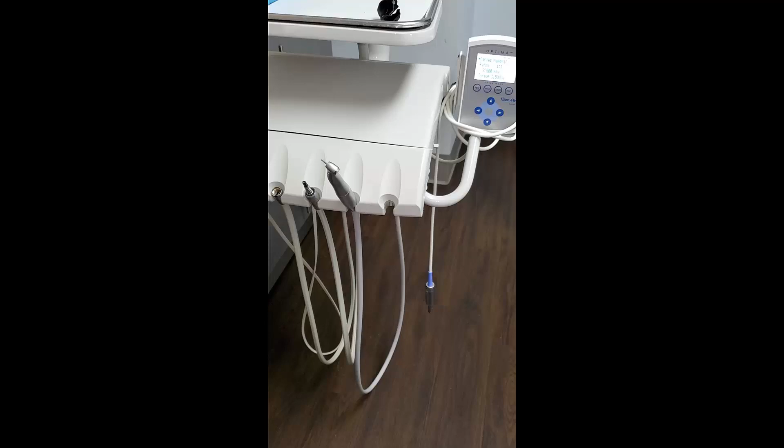So last week on my Instagram and Facebook feed, I mentioned how my Endo handpiece is not designed to fit in this type of delivery unit. It's either this Pelton & Crane delivery unit, or it doesn't fit in my A-dec either.

So yeah, that's always frustrating. They have a little cradle you can set on top, but I think that's obnoxious. I'm just not used to setting a handpiece up there, plus the file is poking out by everything potentially. So anyway, I tend to put it in here and forget, and I don't want to drop it.

So what I did is I took some PVS putty, and maybe I'll find that video later, and I basically wrapped it around here.

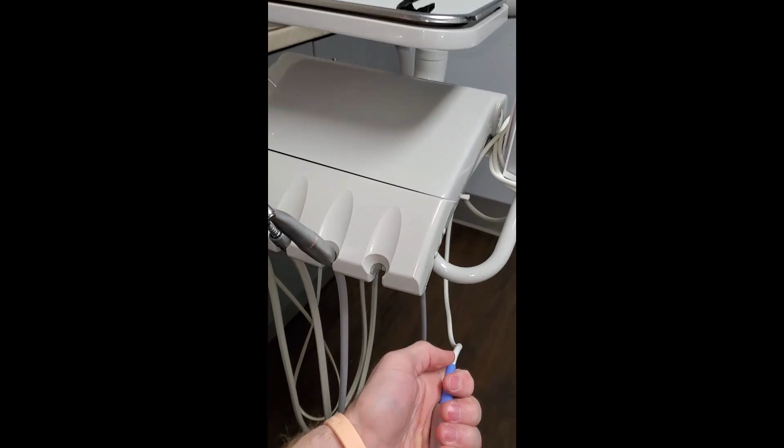Okay, I paused the video. I went back to my office, and this is basically the mold I made of it. You can see that it sort of slides over. It's hard to get this. Oh yeah, I taped it together, so it's a piece of tape, so I won't even be able to separate this very easily. But basically, I wrapped it around there and then shoved it in there, let it set, pulled it off.

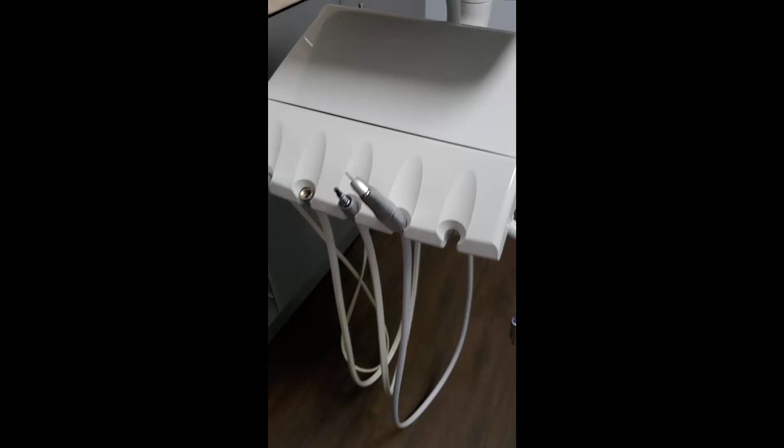And then peeled it apart. I took just some Scotch tape, and then I scanned it in my cone beam to make basically a DICOM of it, and then converted that to an STL. And then that STL, I redesigned and modified it to be exactly how I wanted it to be, and this was the net result.

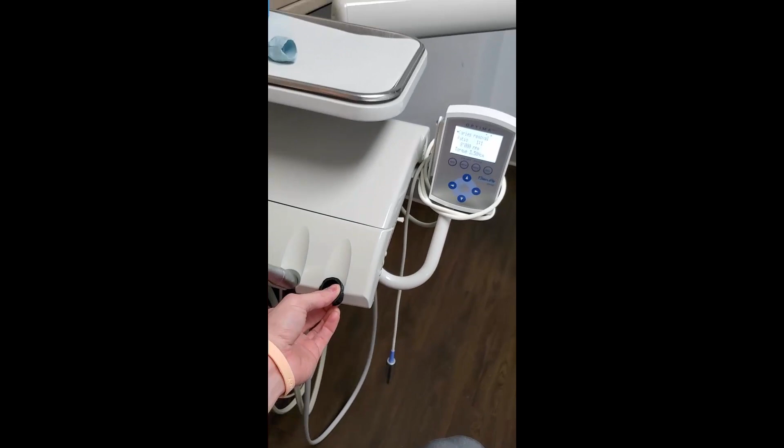Okay, and so honestly, it reminds me of a larynx. I don't know, it's hard to describe, but it looks like somebody's throat. But you can see that it's got a channel, and this whole thing is meant to fit right in here, and it's very stable. If you can see, I'm moving the whole thing around. Now I can get it out if I want, but it locks right in there.

I printed this, by the way. I designed it mainly in MeshMixer because these shapes are sort of unique. I didn't want to have to do more sophisticated design.

But then this fits right in there. You see that? It locks in there. It's not going anywhere. You don't even have to have it all the way in, and it's not going to fall out. Much more secure. Let it fall, set it up in there, and it's done. And again, it pops right out when you're all done with it.

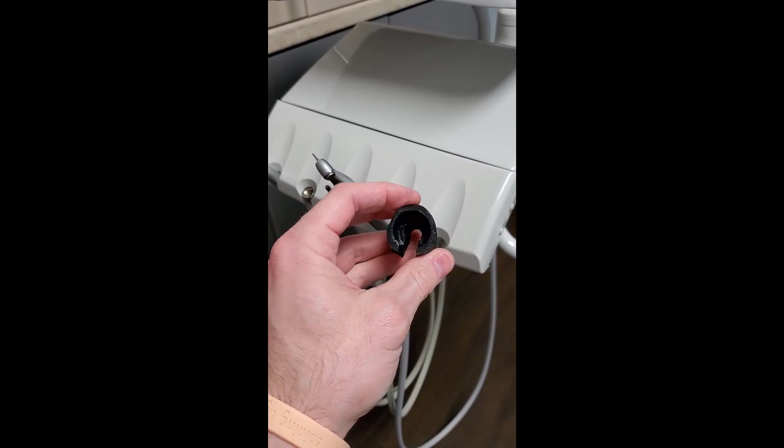So anyway, just kind of a cool way to use our technology that we have, which would be, in this case, I used a cone beam, and then I used MeshMixer, a free software to design it, and then I used an FDM, a Prusa MK3 3D printer with PETG filament because it's a little bit flexible. Can't tell much, but it is.

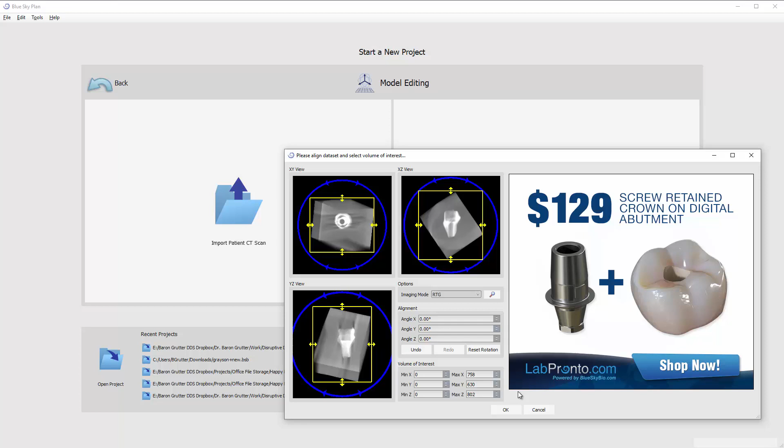Geez, I'm all out of whack here. Whatever, go ahead and move forward. And the software should open up, and then we'll have a chance to convert this into an STL file. Honestly, I'm not sure which of those three planes was correct, so rotating was kind of pointless there.

All right, let's hit close. All right, so here we go, here's our little object. And it looks pretty good. I am going to take a look at it. Everything looks pretty solid, except there are no holes in these locations.

So I'm going to try and expand it until that goes away. I don't mind if there are holes, because I can fix that later, but I do want to. I'm basically going until there's no artifacts, or sorry, no little blebs sticking off. There's a little bit here, and it's tough because you're trying to turn this CT image of PVS into a solid STL object. This is where it was sitting on the sponge, I believe.

You're going to get a little bit of haziness down here, but anyway, I'm going to go back to where I was. Everything's closed. This looks the closest to what it really was, and I'm going to go ahead, I think I'm going to trust this.

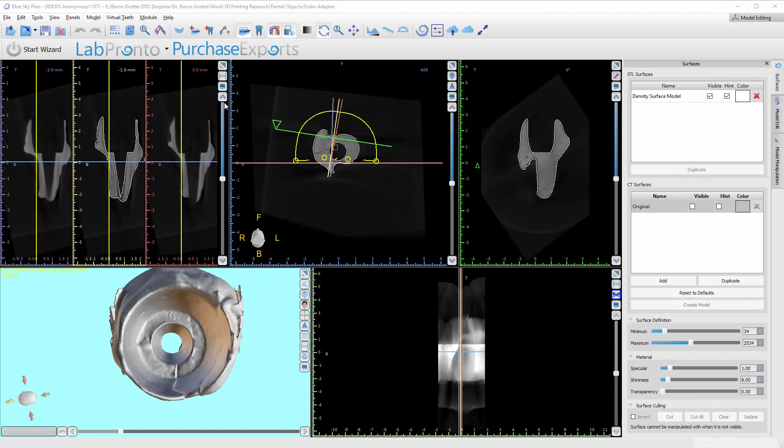All right, and I'm back. So now you can see, well, this view right here is pretty good, it rolls right around and it's turned into a physical object. Now I'm going to say that it looks to me, based on the data, that it's—

A little bit positive, a little bit big on it, but it's hard to say for sure. But I'm okay with that because I can always shrink it back a little bit as I work through this and develop from here.

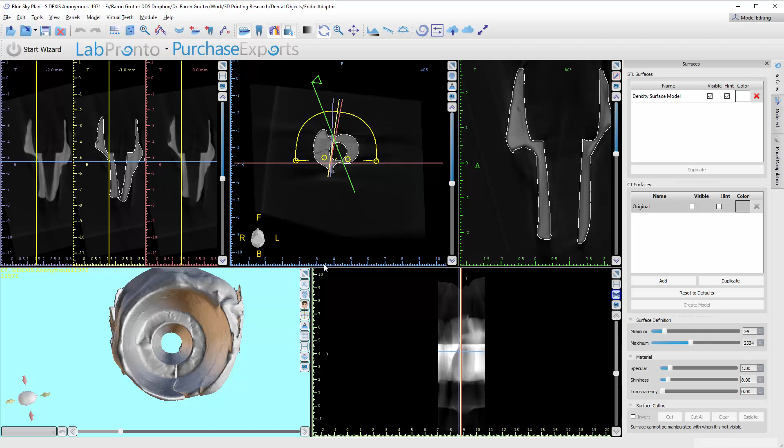So, am I happy with everything? Everything looks pretty darn good to me. Actually, come to think of it, I am glad that I oriented it, even if I didn't orient it properly, which I actually want to say did the way I wanted it to. I wasn't really sure, but having it this way, having oriented it already when I imported it, makes this analysis much easier. Otherwise, it would be all awkward in position and whatnot. So yeah, that was probably a good thing.

The nice thing is, as I mentioned, it's being a little bit positive here. Worst case scenario, since this is a tapered object, it's just going to sit a little bit high, and so will the handpiece sit a little high. So I need to kind of figure that out.

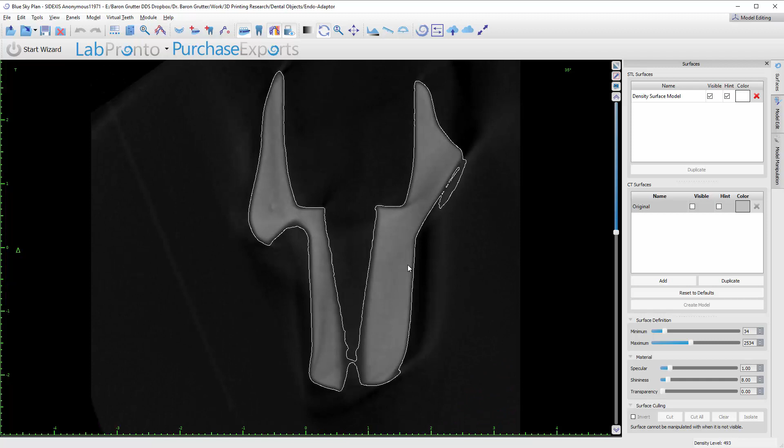What I'm going to do is go ahead and measure the diameter of the handpiece and see how that compares to here, and that'll give me a good idea of how true this is if I need to make any adjustments. The rest of it, the tapered portions, I'm not too worried about.

All right, I'm going to go ahead and, oh yeah, to export it, now I've got this, I can turn off the DICOM and I can see, let's change the color here so you can see what it is that I've actually created. And here's the STL.

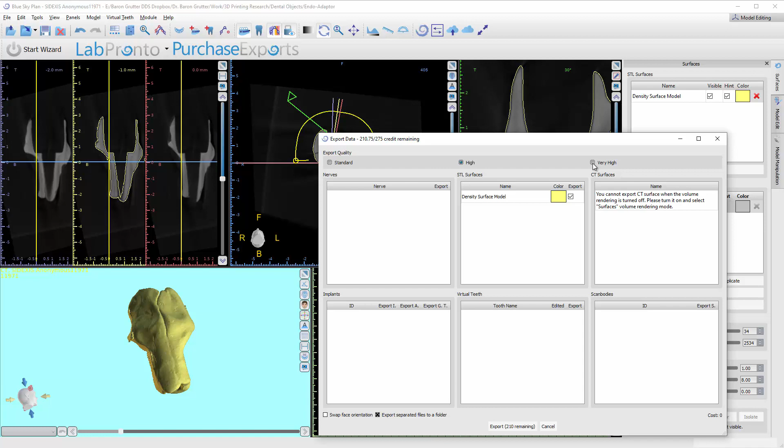Okay, I'm going to export this by going here, export data. Just click on that. I don't really think it matters, but I'm going to go ahead and click very high, and go ahead and click export.

All right, it's exported. Now I can work with it in other software.

Okay, so I did go ahead and measure, and the internal diameter here should be about 22 millimeters for exact contact with the actual handpiece. So I'm going to aim for 22.5 so I can have a little bit of passivity, but yeah, that's about it. So the first thing I'm going to do is I want some clean margins.

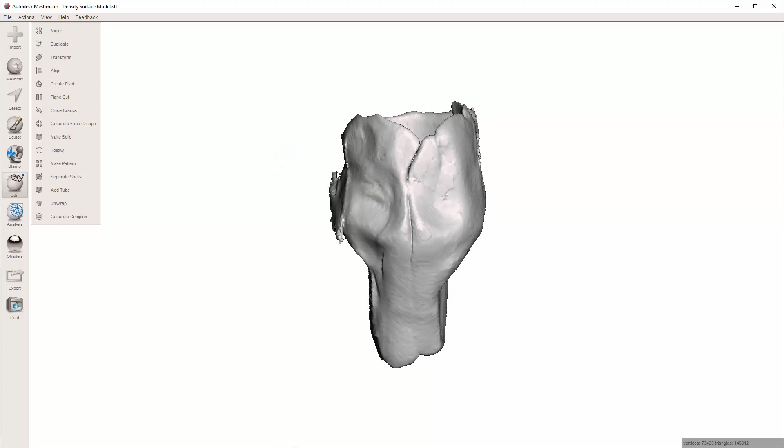I'm doing this on the fly. I haven't actually worked through this, but trying to decide. I was going to plane cut it, but I actually want it exposed. You'll see, I want it to be exposed. So I'm going to go ahead and hit the S button to select, and I'm going to chop it right here, move it up a little bit.

Okay, I'm going to hit B to give myself some smooth borders. Okay, let's take a look at that. That's pretty good. I guess I don't know that I want that much in. Well, yeah, that should be fine. I'm going to go ahead and hit delete.

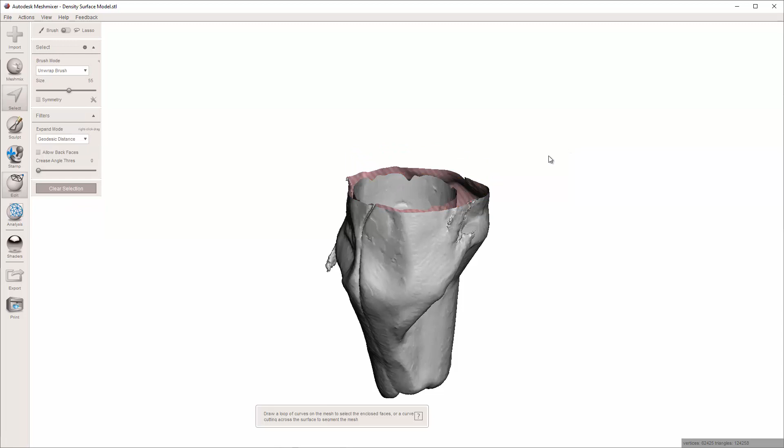And so now I can work from here. Now, one thing I do want to do is bridge this area right here. I don't like the fact that it didn't close up right there. So I'm trying to think of my best solution here.

Let's select again. Let's make that a little bit smaller. And let's just sweep right up here. Okay, unselect that, or deselect that.

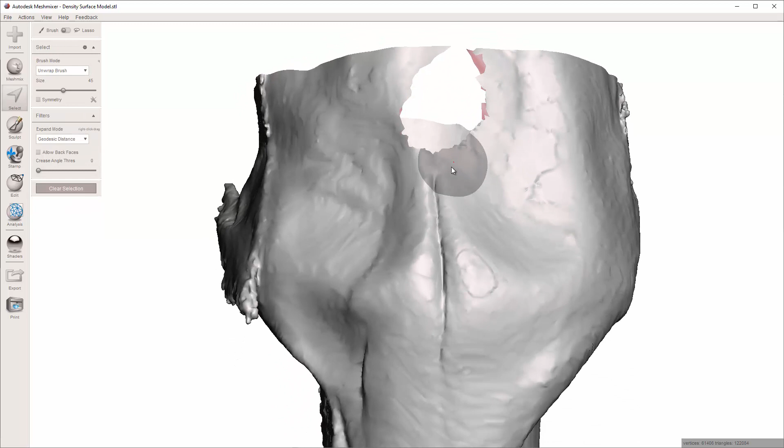And I think we're probably pretty good. Let's hit delete. And now I'm going to go ahead and make this smaller. Here and here. Control B to bridge this across. Looks good. S to select. Select Control B. Looks pretty good. Okay, and now I can just repair these areas.

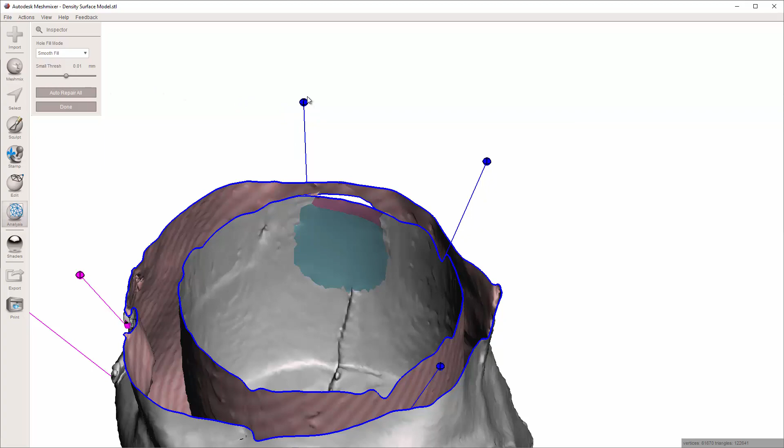Oh, that's a flat fill. I didn't mean to do that. Good, I didn't click it. I'm going to hit smooth fill and click on this guy, click on that guy, and it looks pretty good.

So now, I'm curious, what were those other errors? Obviously, I don't want to close these rims off, but I'll go ahead and repair that, see what's going on. Okay, there was a little hole, a little tunnel somewhere, and I think that may have just fixed that. This is where I was worried about it having one, and I don't think it is anymore.

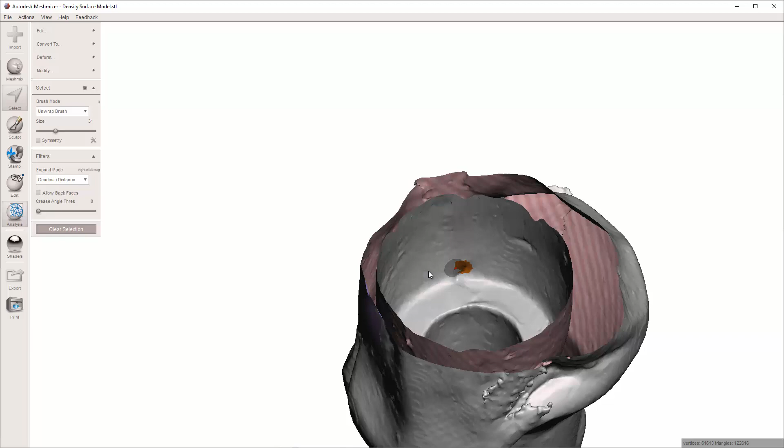I wonder if I hit select, does it highlight anything on the other side? Doesn't. So it doesn't appear that it's created a tunnel. If it had created a tunnel, like a penetration from one to the other, my selection would have popped right through onto this side. So good, I've got two different shells.

Now what I'm going to do now is the same thing on the bottom. This should be a little bit easier. Okay, so now at this point, I'm going to go ahead and slice this part off as well. And so let's look, did I get that pretty even? It looks like I did. I could spend more time making sure it's a little more exact, but I don't think it really matters all that much.

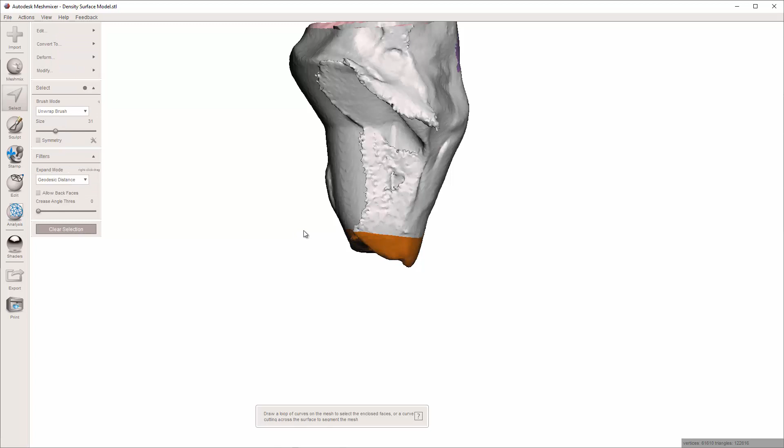So I'm going to go ahead and hit B to smooth this out. Hit delete. And okay, so if you're wondering why did I want two different shells, you know, if I had done a plane cut, it may have sealed that off. But the truth is, I don't want that. I don't want a plane cut.

Now you can see all this ragged surface over here. That's disappointing because that is because of the sponge, and I need this to be smooth like it is over here. So how do I fix that? And I got to think about that for a second.

I could try to cut this in the middle and mirror image it over, and that might be a good option. But for now, I'm going to go ahead and turn on my objects browser, and I'm going to duplicate, and that way I can work on it however I want, do whatever I want without any fear of losing all the work I've done in case I don't like what the results are.

And also I'm going to go ahead and save, because this is a pretty complicated file. It may not look like it. There's a lot of surfaces here, so I'm going to save this. Okay. And so now if my computer crashes, I can always open it back up.

Okay, so let's get this out of the way, and let's turn on the sculpt brush and turn on robust smooth. Let's make it a little bit larger. Turn this down a little bit while we figure this out, and I'm just going to try to smooth it back.

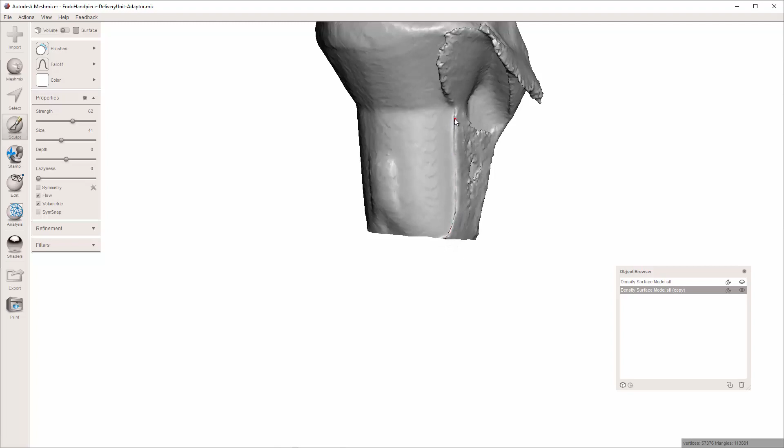Now, what's funny is that as you change the angle, it'll change how it smooths. Something you just figure out with time, I guess you might say. Okay.

All right, so I'm going to go ahead and try and mirror this over, because I think that might be an interesting approach. So I'm going to hit escape. I'm going to click on this. I'm going to click on the select bar. I'm going to highlight this, hit the Y button to separate it, so now that the inside is no longer part of it. Okay, so now I've got this.

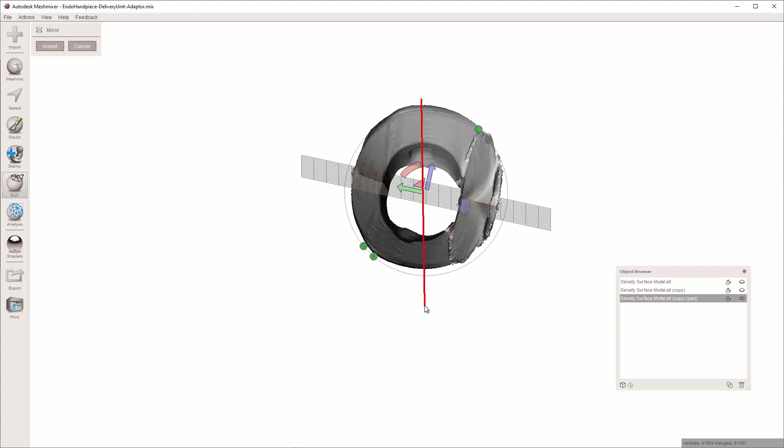And I'm going to click on Edit and Mirror, where, oh, good grief, right up top. And I'm going to try to bisect it perfectly. Is that necessary? Maybe not, but I'm going to flip it over, and I'm going to turn the original back on so that I can then see how close it is. That was actually, I'd already done it pretty well, actually.

Yeah, I think I like this. I mean, I don't know that for certain it's going to work, but I've got a lot of mesh overlap, which makes me think it's pretty consistent. And I don't see a great disparity from the original to this. So I think I might have got it already, which is, I don't know, I think it's pretty impressive. Let me click, I'm going to click OK.

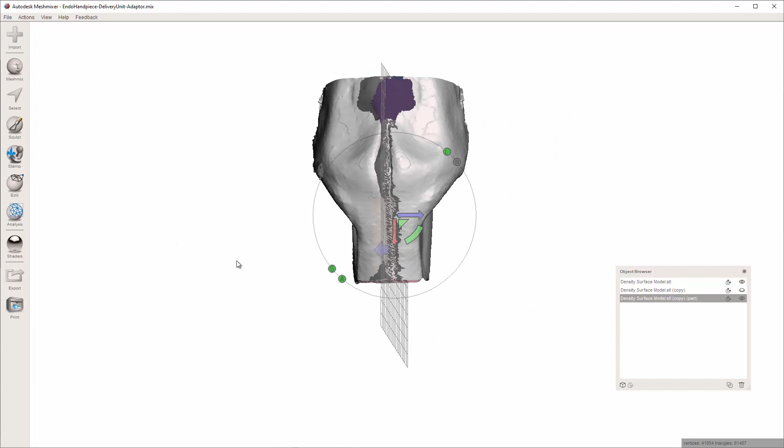And so now let's turn this off. And there's that. And this side, this part right here doesn't matter because that's open to, that's open. That doesn't, there's nothing important there holding it. So what I'm going to do here is I'm going to use the select tool. And I'm going to come just like this, create a nice smooth line.

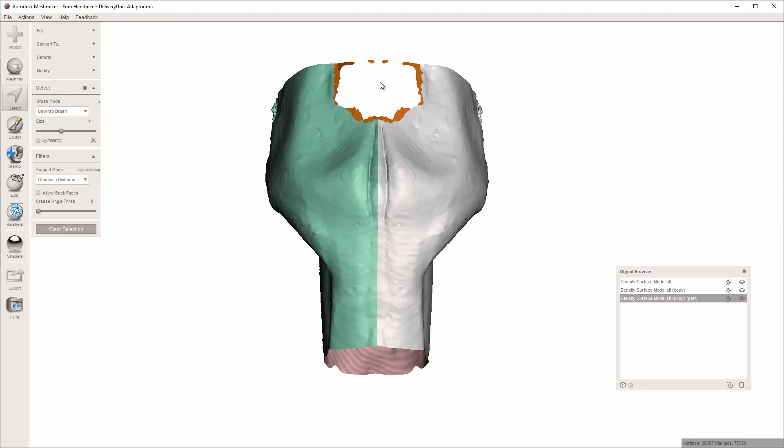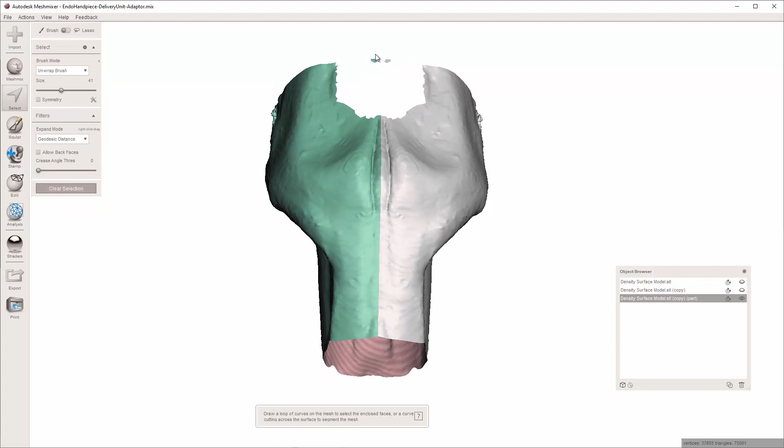I'm going to hit B to smooth that out. Oh, nope, that didn't work. It's because of these little random spots. I'm holding shift to deselect those. I'm going to hit B again. It might not work—yeah, that doesn't surprise me. I'm just going to hit delete instead.

So now we've also got these little rough areas here. But how relevant is that? It doesn't matter because that's above the top of the delivery unit, so anything above it is more or less irrelevant.

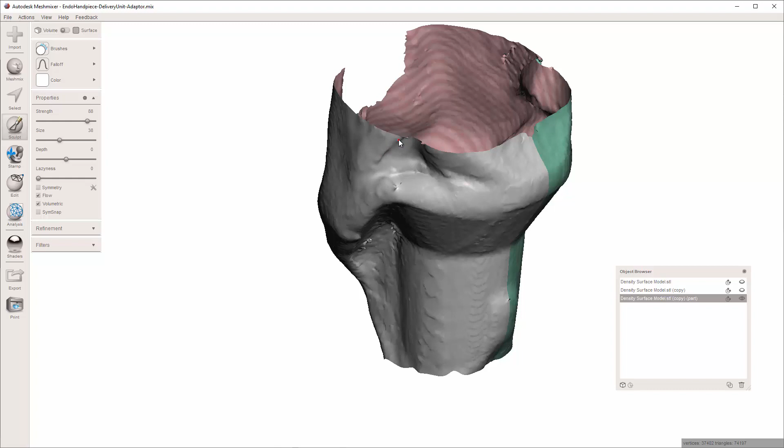I may want there to be some, so I'm going to go ahead and smooth these areas out. I'm going to dial this strength up, go a little bit larger, and just smooth the heck out of this. This doesn't matter—I probably could and should have done this before I mirrored it so it would be symmetric, but I didn't. Oh well.

I'm going to zoom in here and hit my select button. I'm going to hit F to erase. Oh, didn't like that. F to erase and fill. Done.

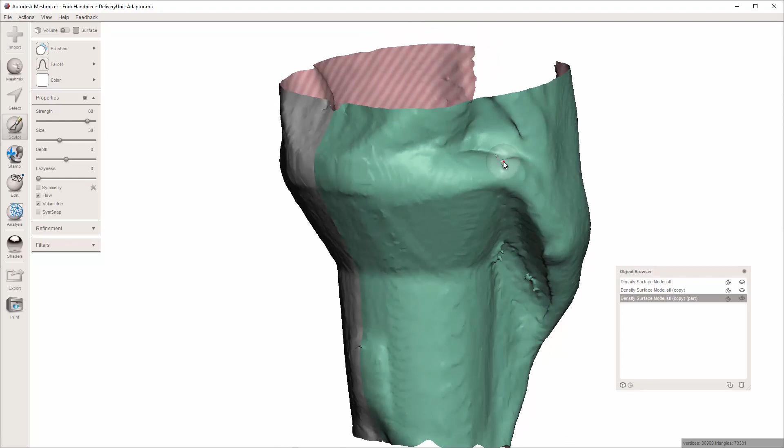Once again, sculpt—let's smooth this all out. Let's get back to the bigger tool. And select. F to erase and fill. Good. Oh, F. Accept that. Okay, sculpt.

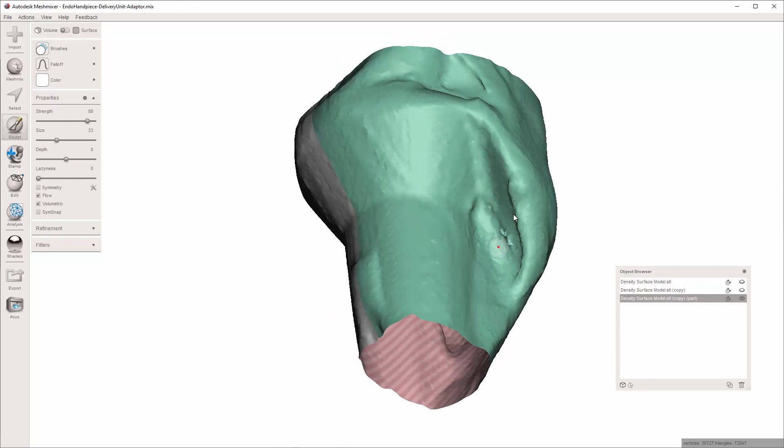All right, so now we've got the outer shell pretty well set up. Once again I'll go ahead and smooth this stuff out. All right, everything looks pretty smooth. Looks almost like a throat. Anyway, I'm going to duplicate this just so I don't accidentally change it again. Outer shell final—I'm going to turn that off just so I've got that.

Now I'm going to look at the inside, because here's the thing I mentioned before. Let's turn this off, hide this, turn this on, and play around with it a little. First of all, that part got disconnected—that's why it disappeared from my previous one. That's where it was. That's unfortunate, but it shouldn't matter, since it's not going to be what's holding the handpiece in.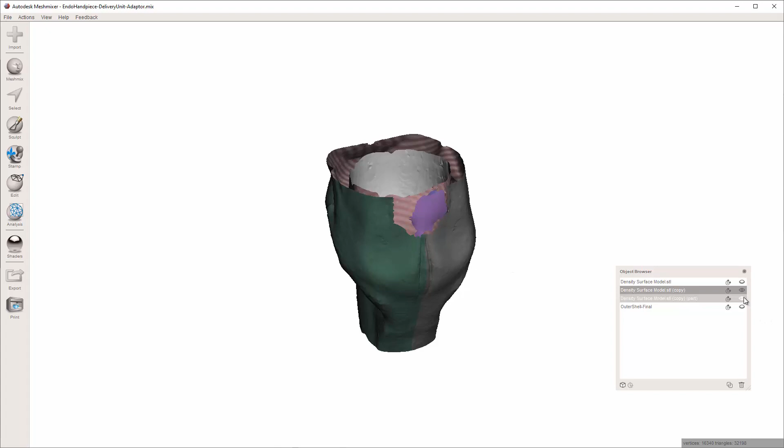In fact, I'm going to do something—I'll go ahead and bridge this. That looks pretty smooth, and now I can just hit Inspector, Smooth. There you go, and done. I'm going to delete this since I've now edited that. And now, outer shell final. Okay.

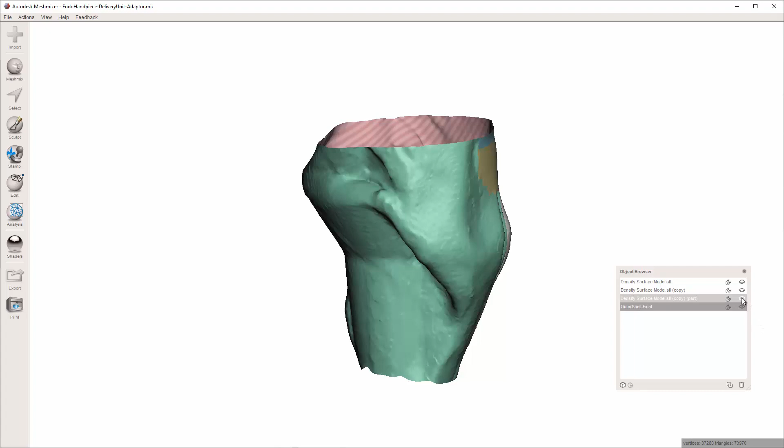So let's work on this a minute, let's get this looking good. First of all, I'm going to delete these extra pieces—don't need that. Now I'm going to check the internal diameter of this.

To do that, I'm going to go to Units/Dimensions. I'll click from here to here, and then I just drag this up. This software isn't the best for taking these kinds of measurements, but it does the job. Okay, it says that's 21.9, so it's pretty accurate. I want it bigger, but it is pretty accurate.

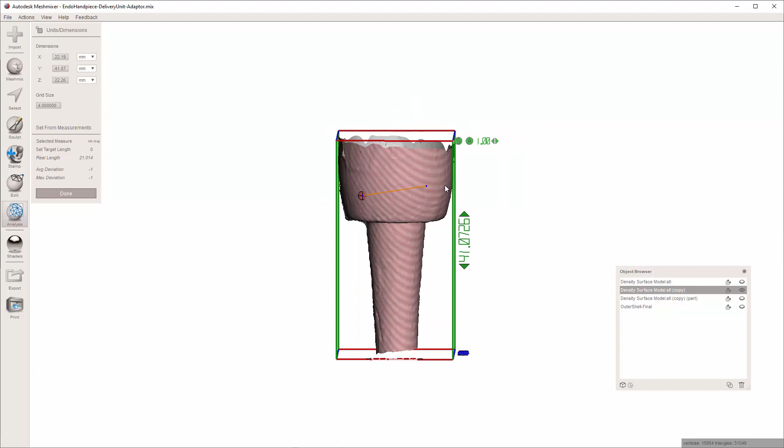Let's go ahead and measure from here to here. It's about the same height—well, that's pretty low actually. So let's move it up here because it does taper, and that's about the same height. Same, and it's pretty straight across. Maybe move this over a little bit. And 21.8. So the point is, I need to increase this—I need to expand this.

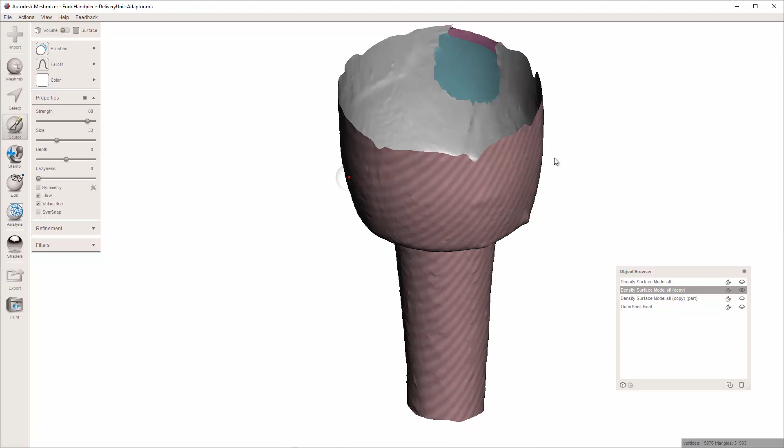But before I do that, I want to smooth this out, and I'm going to click on the Sculpt tool. Okay, pretty smooth. I'm just doing single clicks on these areas, not trying to be too aggressive, because I want it to still fit just the way I got it, but it's just the nature of this PVS material. I wonder if I look at this where it's flat—am I in orthographic? I am. Orthographic view is really nice for this, because although this might be flat, now this isn't. So orthographic, when this is flat, the base—I know this is as well. So now I can do select, select, okay.

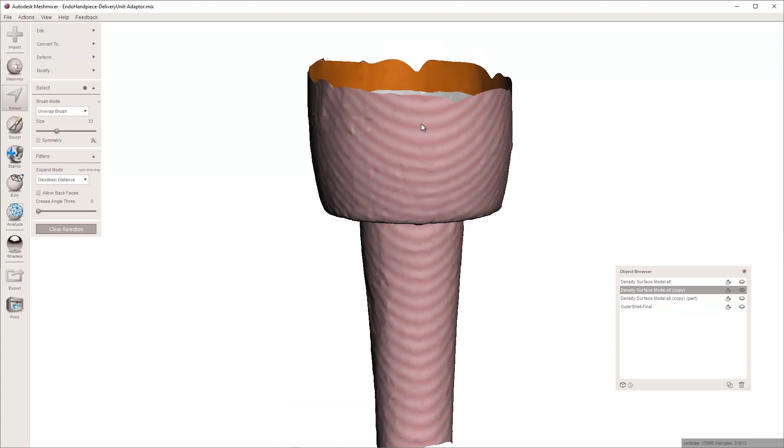Let's see if I can get a smooth border. If I can't, I'll try a different option, but yeah, I'm gonna try that. And then hit delete. And now I'm going to do that.

Hit T to transform and just go straight up with it. I wonder how this will look, because it looks like it's going to be really rough. Yeah, I don't like that.

So I'm going to leave the part that I had on there because it was extra data, and I'd rather just keep that for now. I don't even want it to change color like that.

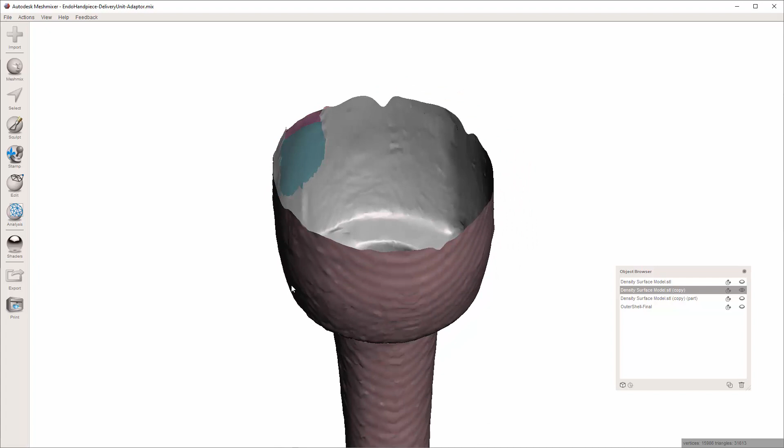Okay, so we've got this as is. And now I am going to, what am I going to do? I could flip it, invert it to smooth things out a little more and do other things with it. If I needed to repair things, sometimes that would be helpful, but I really don't see the purpose here. Looking at the outside as pink kind of is odd.

But now let's go ahead and turn on this guy. Now I'm going to, oh yeah, actually I'm going to turn this off, but I'm going to turn the magnet on. So now I can see the positioning within it, because I want to have it fairly centered, and I want to have it oriented properly.

So now I can see that I can slide the whole thing backward.

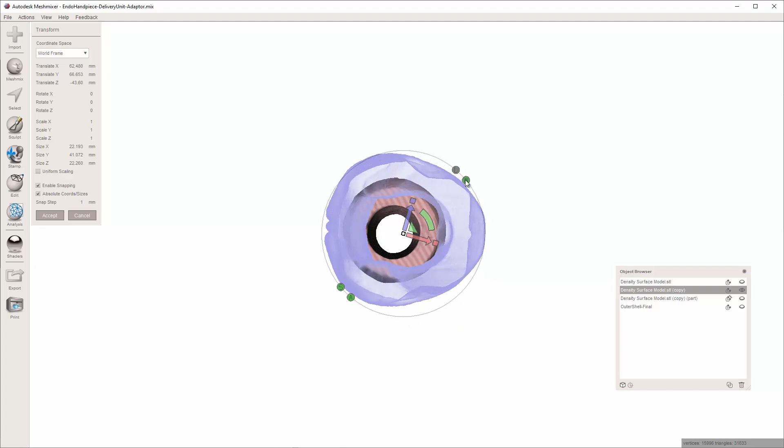Let's go ahead and work on some coordinates here so that things are symmetric. Turn them all on. And then I'm going to view the grid. And where is my front?

Well, I want to see where it's front and back, but a little widget is supposed to be up here in the top right corner. Sometimes it disappears, and I honestly cannot, I'm not sure how to turn that on. It's like it's there or it's not.

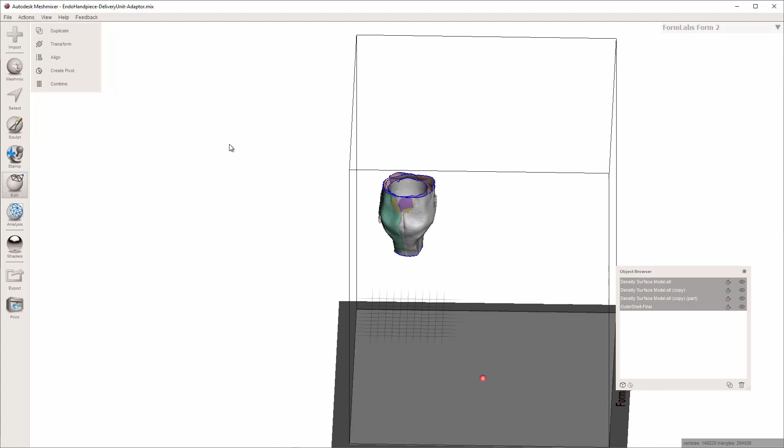So here's a print bed. We can just center it off of here. Okay, so I've got everything selected.

I'm going to hit T to transform, and I'm going to bring this up front. I'm going to bring it down. Maybe I don't need to have it in the middle. I'll just put it in the middle, and I'm going to rotate it until that seam is pretty much right at the middle. Hit accept.

View grid. Okay, yeah, the grid did already move. Just wanted to make sure that grid was where I wanted it to be, and I think the whole thing needs to rotate just a little.

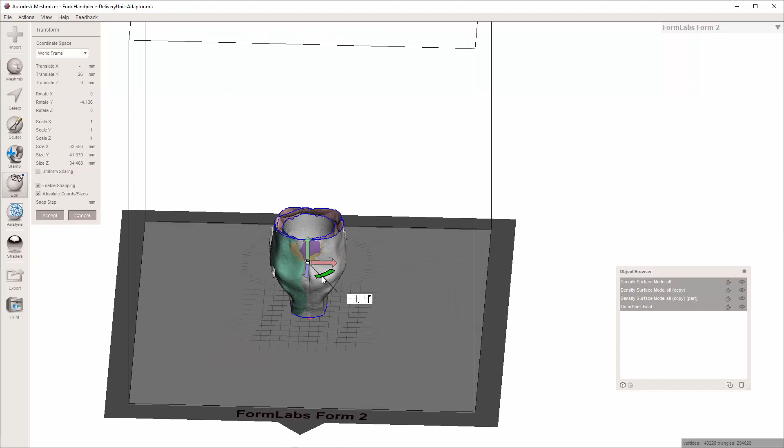Okay, now hit accept. All right, so now I can work a little bit more within my coordinate system.

All right, let's go ahead and duplicate this as well.

I'm going to move it back a little bit, but I also want to tip it back a little bit, because I remembered seeing that I didn't like the way it was tilted back by comparison. And so I've just tipped it back a little bit.

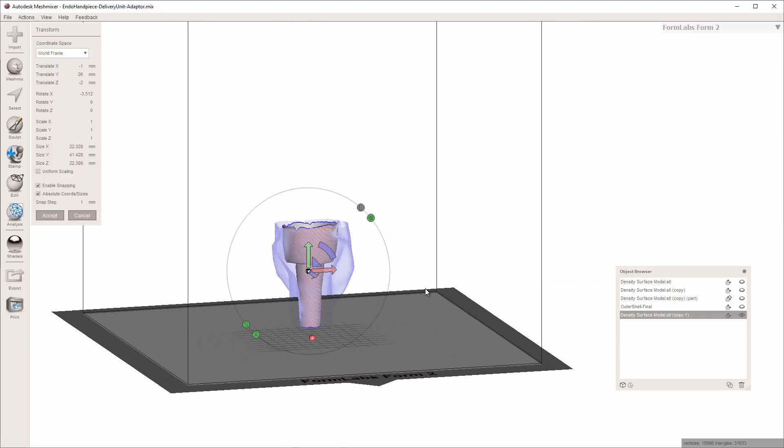I didn't even measure really. I also can slide it over a little. Looks pretty good.

And I don't want this to be so— yeah, I can increase the scale there of the transform tool by just using the arrow buttons up and down.

Now most of the pressure is going to be applied to the front of it, because that's gravity. It's tipped down, so I am cheating it more to the back than the front. I want more strength there. Maybe I went just a touch too far, but there we go.

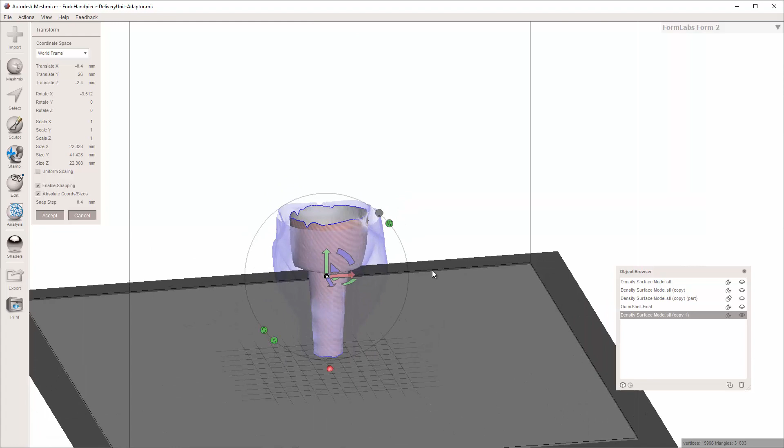I think we're looking pretty good, honestly. I'm pretty happy with this. Okay, everything seems pretty centered. Hit accept.

And now I'm going to go ahead, and now that I've repositioned this, I am going to copy it again, because now I am going to scale it larger. And I want to scale this.

So I'm going to go ahead and scale it by 4%, or yeah, I gotta do it, bring up a calculator. So 1 divided by 22, that's a little less than, or more than, sorry. So yeah, 4.5%.

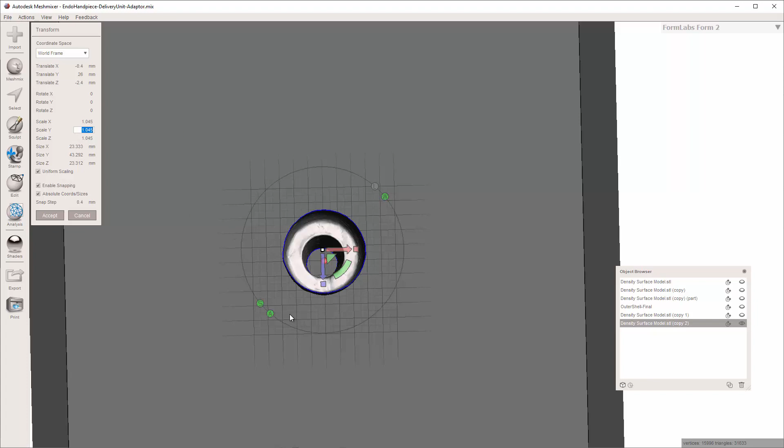Cancel. I'm going to have uniform scaling here. 1.045, there we go. Now, I didn't necessarily have to go vertically as well, but I don't really think that matters, especially with as small of a scaling as that is.

And now I'm just going to go ahead and hit accept, and let's just look at the difference. It's pretty minimal. It's probably even more than I wanted, but this printed object is going to be very hard.

I'm going to undo that though. I'm going to go down to 3%. Worst case scenario, I have to reprint it. So anyway, I'm going to go ahead and turn that back off. Hit Control Z. 1.03.

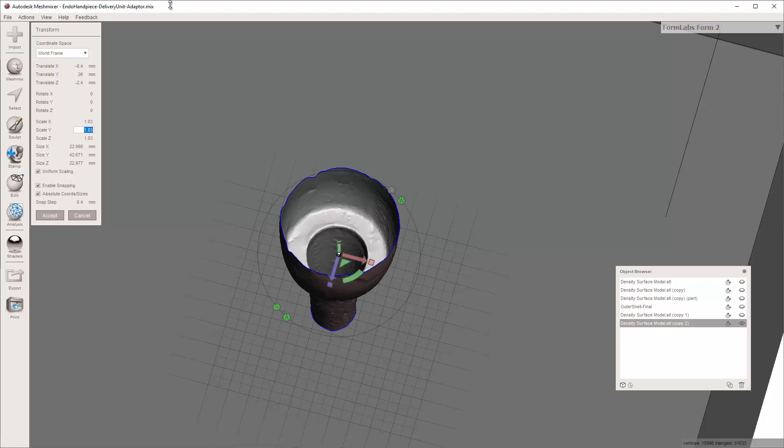And there you go. So that's not much, but a little bit. And I'm good with that.

So I'm going to hide this. And so now this is inner shell final.

Okay, so now I've got this and this. I'm going to duplicate these again, turn them off. And now I am going to combine these two things together, and going to try to join them, which gets a little tricky.

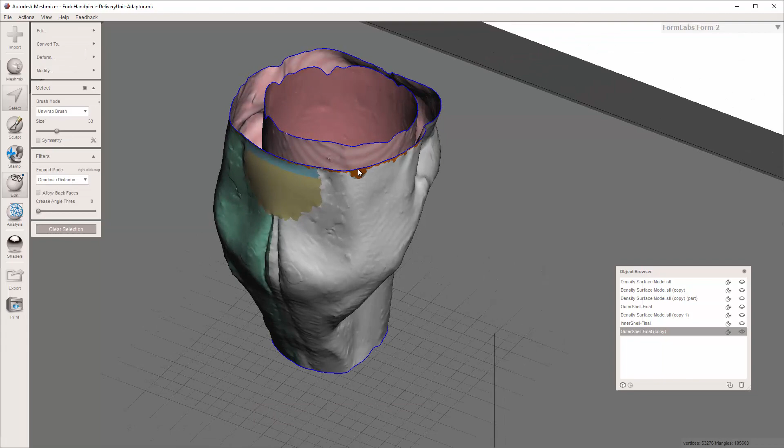I'm going to try to join them. Actually, that did better than I thought it might. Okay, hit accept. And what did I forget to do? Save. We are way too far in this to forget that.

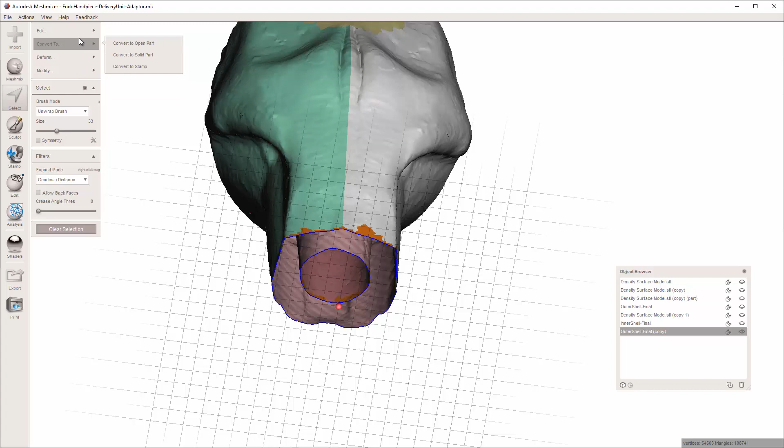So that's done. I'm going to turn off the print bed, don't need to see that anymore. I don't need to see the grid anymore, but that's fine. And now I'm going to hit select, edit, join. Looks good. Accept.

And so now I can plane cut it or I can smooth it. I'm going to try plane cutting it, see how that looks. See if it seals it off. It does.

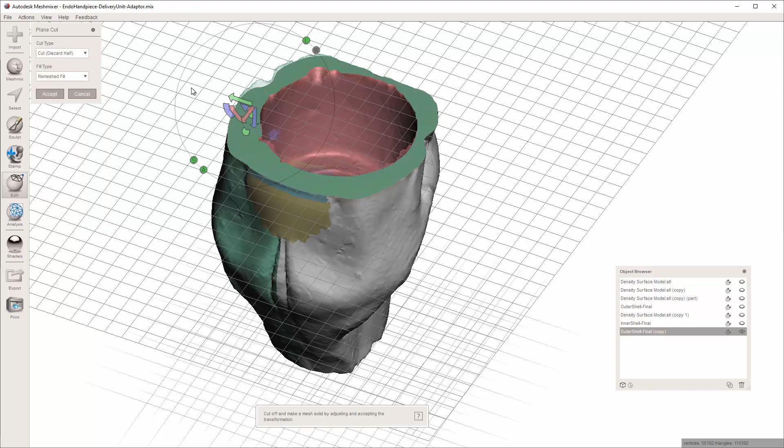Yeah, I like that. So I'll deal with these little indents later. And plane cut. There we go. And there we go. So now I've got an adapter.

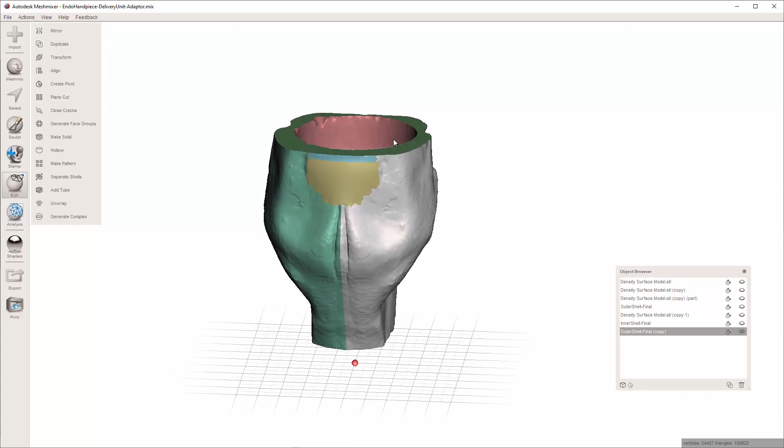I mean, again, I want to fix this because I like everything to be perfect, but it's going to be a little bit hard to do that. In this software, it's not great for this.

Just sculpting, dragging up, more than anything, just trying to make it so it's not so obvious there. And now I'll try to smooth it. And now I'm just going to kind of smooth off all the edges, turn the strength down a little bit, and that'll help it all blend in.

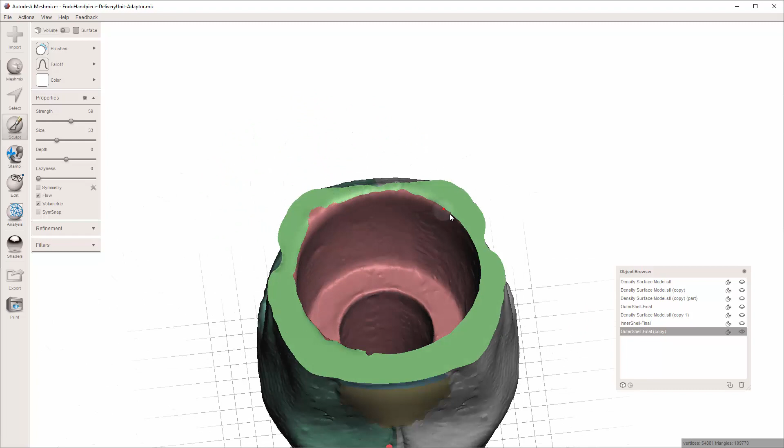Plus, I've got differing colors right now, which just makes everything that much more obvious. Now, I don't want to smooth it too much because I am going to try to print it on its edge. I'll probably print it from the bottom up actually though, because that's a bit thicker.

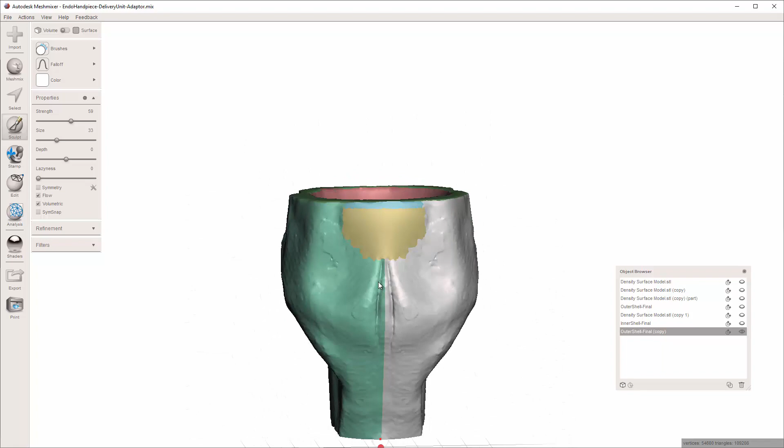Now, one thing I do have to do that I almost forgot is I have to create a way for you to get the hose in and out, or the cord in and out of here. And that's obviously pretty important. So let me think on that while I'm smoothing this out.

Okay, so I just stepped away and actually measured the diameter of the hose, and it's about 6.5 millimeters. So I am going to do something a little bit funky here. This is, again, me sort of thinking out loud. So here's the inner shell. Let's go ahead, let's hide this. Let's duplicate it again.

And this time I'm going to hit Control A to highlight the whole thing, edit, flip normals, and now I'm going to go ahead and use the analysis inspector. Let's go ahead and seal this off. That's fine. Okay, so now it's a solid object. Is that necessary? No, not really. Truth be told, all I really needed is the shape, but whatever.

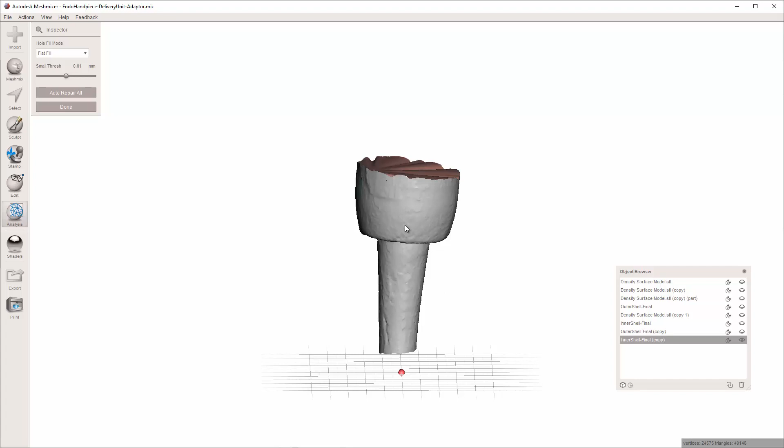So I'm going to click on the, I'm going to hit transform, T to transform. I'm going to move this out here. I'm going to turn on the outer shell, the copy of it. And I need to be able to get this more or less.

Well, I don't want to go, I just want to go up with it. And I want to go out with it. Okay, so I don't want to necessarily go this side. I didn't have it perfectly rotated, but that'll help me there. Go up a little bit. And so now I'm just going to try to create a channel based off of this.

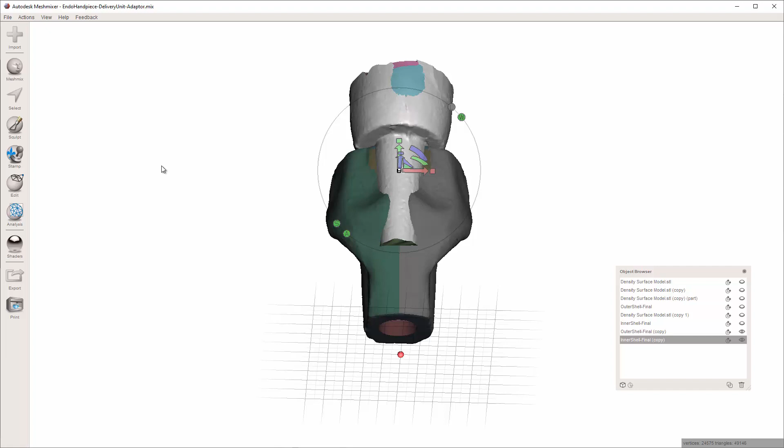So what I need is, what do I need? Yeah, I'm going to actually go all the way to the top. So this is practically sitting on here. Okay, now I could infinitely expand it mesiodistally, or drag it out, or scale it.

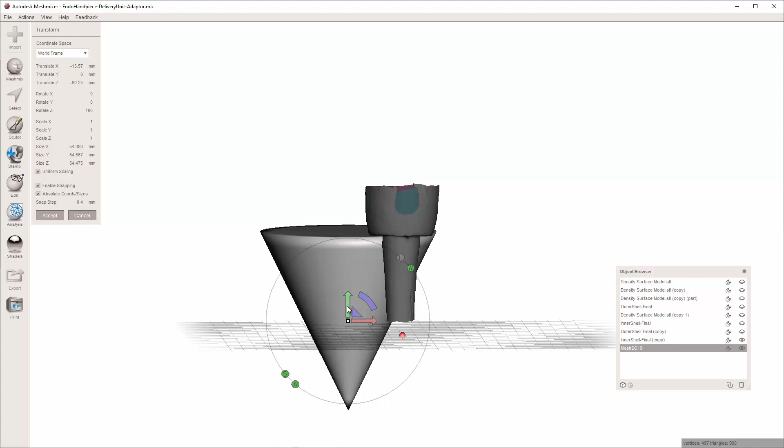But instead, what I'm going to do is I'm going to turn off the outer shell, bring in, see if I can find it. I can bring this in, flip it over, and I'm going to make it super, hit accept, hit T, let's get it close.

And I'm going to go way long with it. Way long with it. Alright, it's about the same taper right there. And I'm going to hit accept. I'm going to hit edit, plane cut.

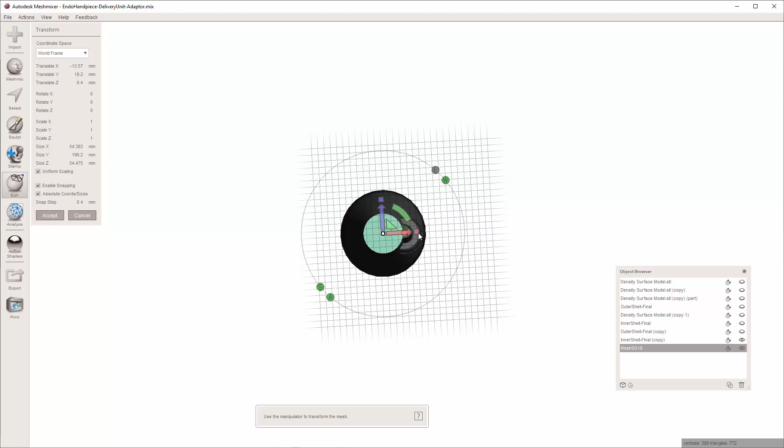Accept. And so now I'm going to go ahead and hit T, transform, and I'm going to make it, well, shoot, I don't even, dang it, I'm sorry. I don't actually want a cone. I already have a cone. I want, what do I want? I want...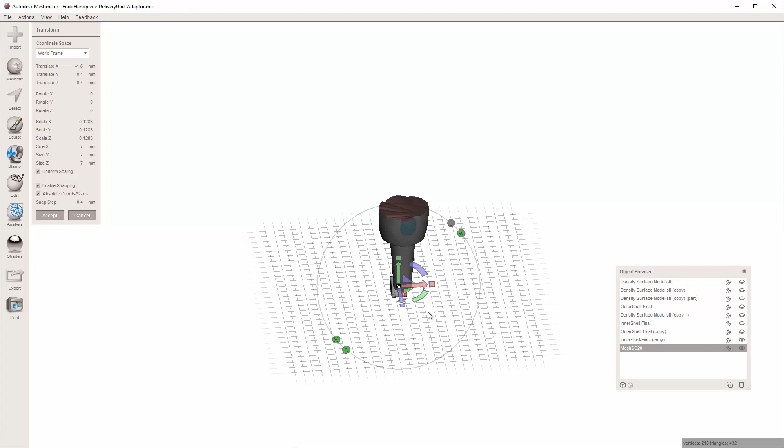Okay, so let's do it this way. First of all, I need to have a 7 millimeter. Okay. And that's going to create the channel apical to it for the cable itself. So that's the first step, and I can have this super wide.

Okay, and now I need to have essentially, I'm going to go ahead and go as wide as that. Okay, so am I at, let's turn off uniform scaling, red X is 8.5, or 8.4, let's go to 8.5, oops, 8.5, okay, so that's about the apical diameter there.

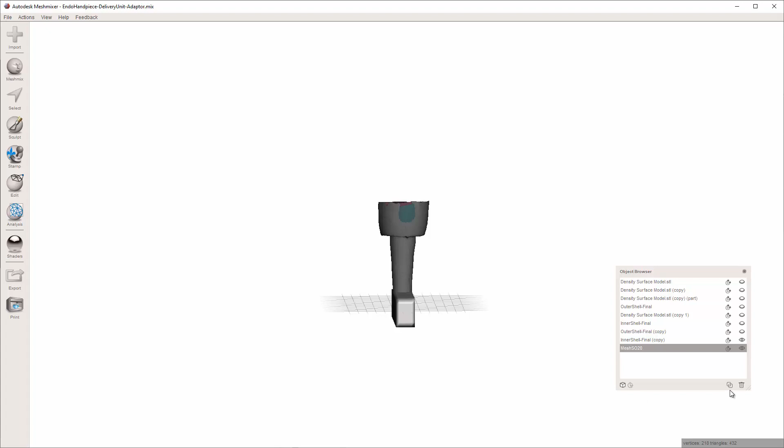Hit accept. Now I'm going to duplicate it, bring this up here.

Okay, so now I've got it that way. I need to, oh, this will be interesting. Let me duplicate this. This one I'm going to tilt.

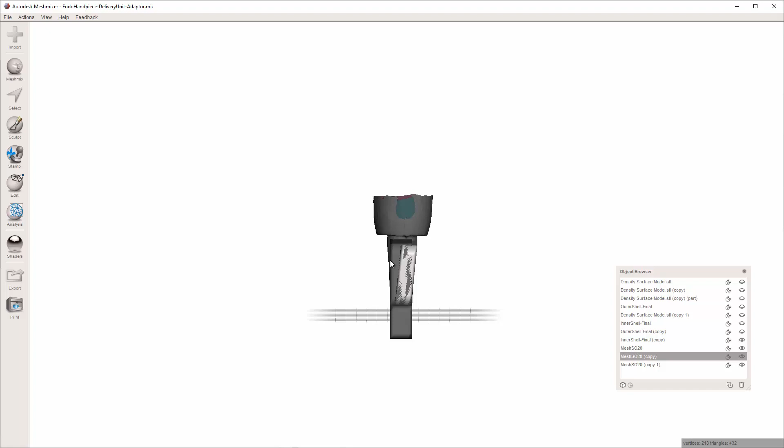How many degrees was that? I think it was, I gotta pay attention. I'm at, we'll say 6 degrees. Okay, slide that over here. Looks good. Hit OK. And now I'm going to take this one, 6 degrees, to match.

Okay, slide it over. Maybe a bit much, but I think that's fine. Hit accept, and so now I've created a channel that more or less, or a couple of blocks that will create a channel that should more or less be the right shape for this to slide in. So hit accept.

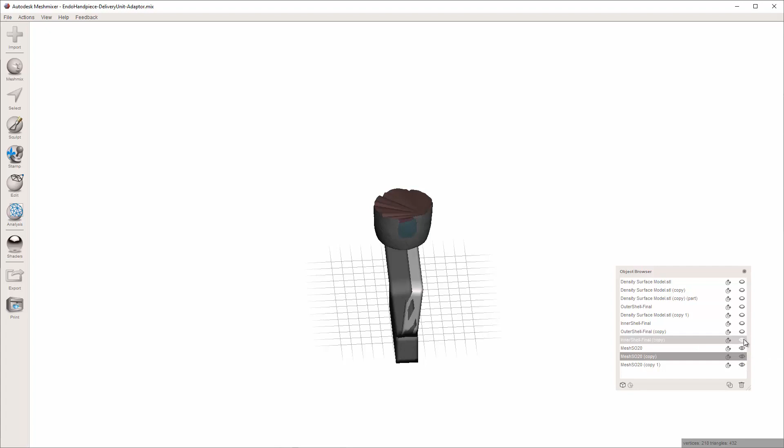Let's turn off this guy. Let's turn on this. And let's go ahead and combine these. And now we can move them as one.

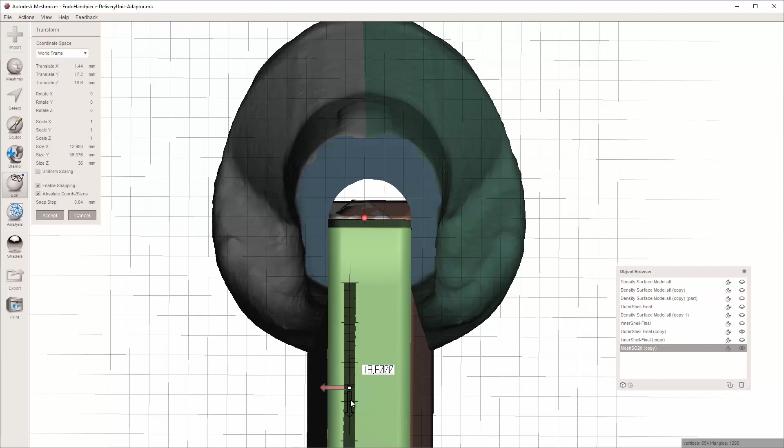Okay. And I need to bring this up. That was a mistake. I forgot. I don't know how that happened exactly. I must have lined it up to the wrong thing.

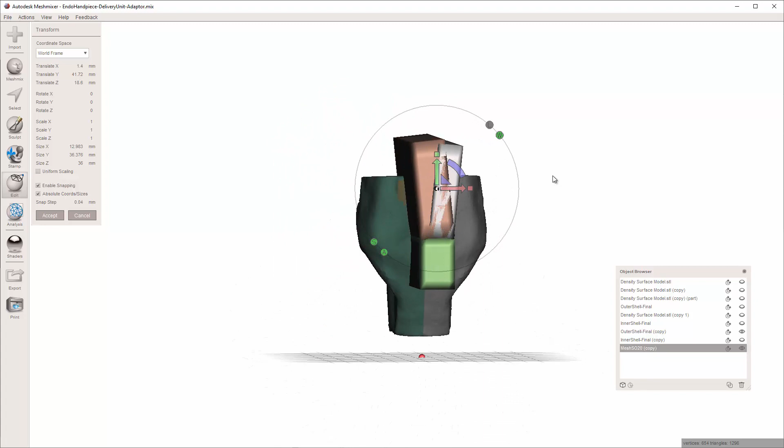Okay, this part, I need to scale it much bigger. Okay, hit accept. And so now I'll see if I can do a Boolean subtraction, but I always hit save first.

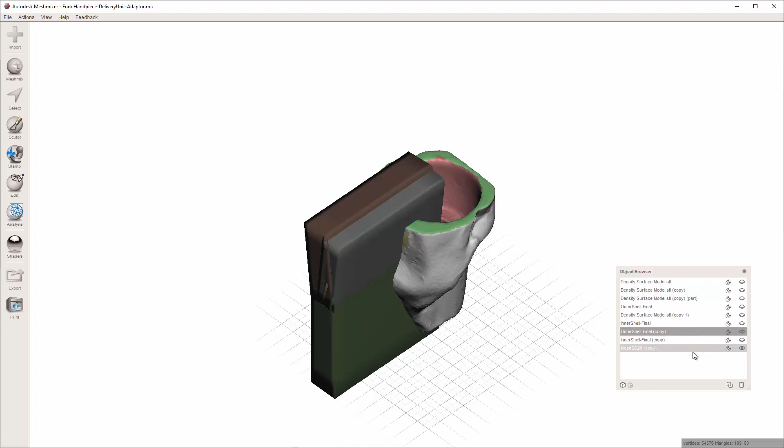Okay, so let's take this guy, select this one, and let's just see if we can get this to work. I'm not overly confident, but I'll use 3D Builder if it doesn't work.

Okay, and this was the result. And lots of little error things. Again, I was not surprised. The sad thing is I really would like to just accept it and then go in and manually delete and repair things, but the software won't let me. I am going to bet it won't let me, at least. Let me hit accept, and yeah, see, fatal error.

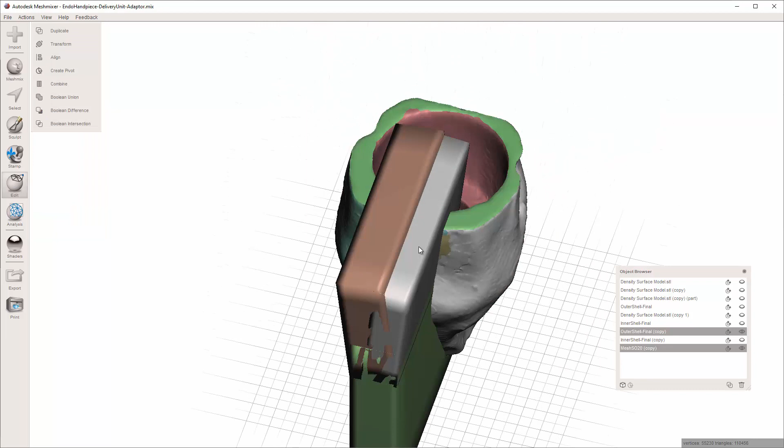So instead, what I'm going to do here is I'm going to export this. Solid adapter, and I'm going to select this, export, channel. Okay, so now 3D builder,

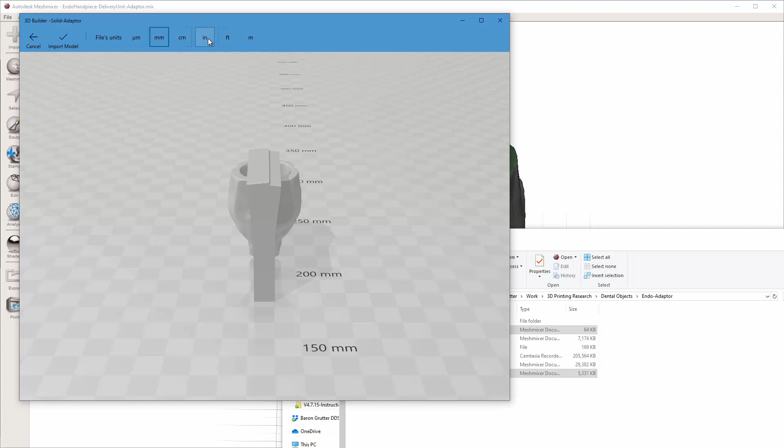new scene. Going to hit this and this, drag them both in at the same time. It needs to be, make sure you have your units as millimeters, and my default is inches, whatever. That will not be a good thing. So now it's in here.

It's kind of weird, this software, you get kind of used to it, but I'm going to go ahead and just click on this one. I'm going to go to edit, and I'm going to click subtract. And there, it's done. It's just amazing how much faster this software is for that stuff.

And hit file, save as, what I'm really wanting, Endo adapter, all final. Endo handpiece. Delivery unit adapter. Change the file type to STL. Hit save. And there we go.

Final. Here it is. So let me go ahead and open up RayWare.

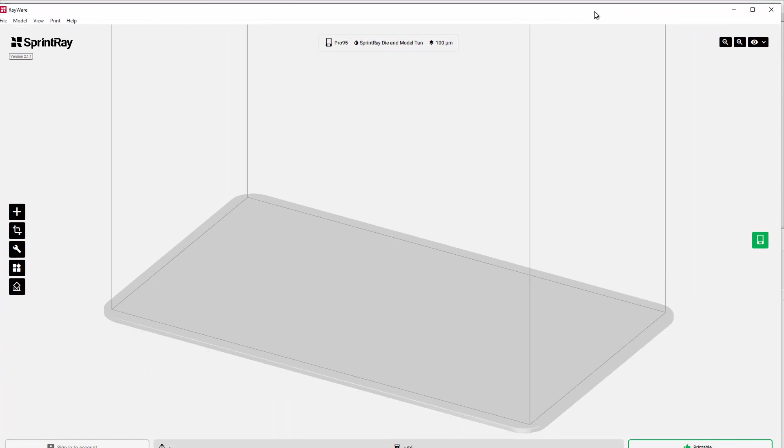Now, that whole smoothing off of the bases is probably a bad idea because it just ends up making it going to be a little bit harder to align. So like that, because I smoothed it too much, it doesn't like that. There, now that's smooth. And this will print.

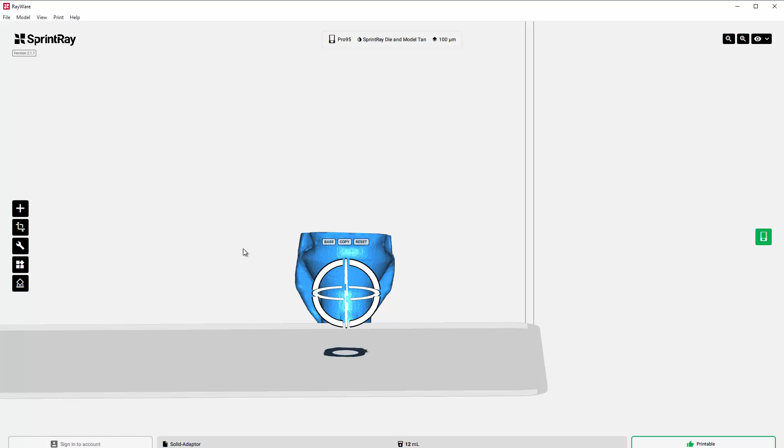I'm trying to think anything that will fail. It's not going to fail. I can't see any reason why it would. Printing the other way actually could be a problem because of this big flat ledge, but we don't have any ledges. So this is ready to print. I'm probably going to print it at home using an FDM printer just because I need to leave.

But, oh, well, that's interesting. It has the channel. Where did that go? Okay, so why did I import the wrong thing? Final. I did solid adapter. Silly me.

All right, so base. Just click somewhere over here so I can visualize the base. And there we go. So now it's ready to print.

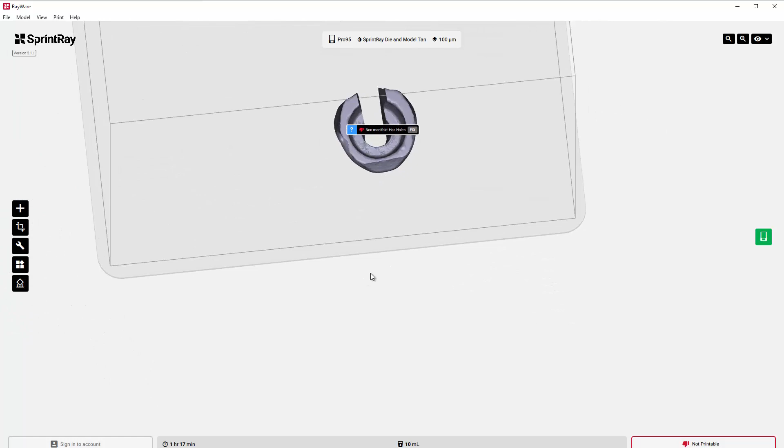And again, I'm probably going to print this using FDM just so I'm going to go home. But you could print it in surgical guide resin, print it in a lot of different things. Possibly even ortho IBT resin, because then it would be squishy and a little bit more pliable, and that might work. I honestly don't know. But yeah. So there you go.